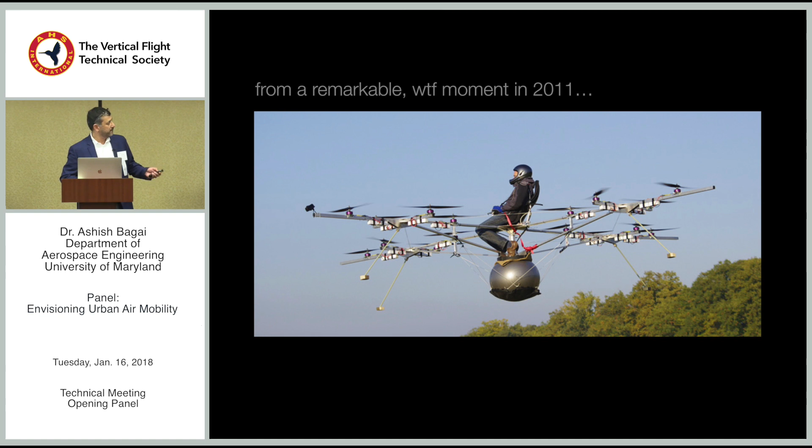To the pervasive emergence of electric-powered aircraft with distributed propulsion, we see today the proliferation of a new species in the taxonomy of vertical flight.

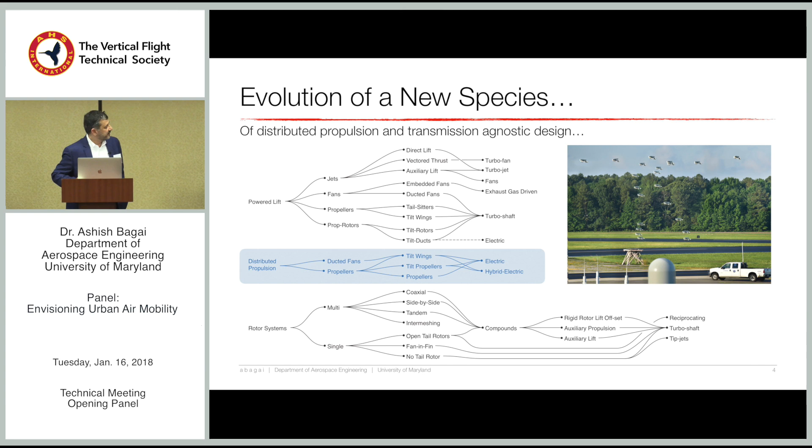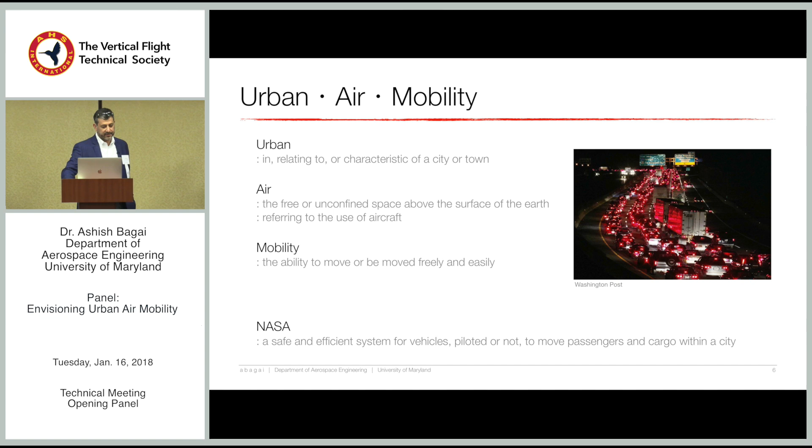So good morning, ladies and gentlemen. We are gathered here today to discuss the potential impact of these revolutionary technologies and the impact they will have on being able to transport ourselves expeditiously to and from our destinations. As we know, urban relates to the high-density ecological architectures that characterize towns and cities. Mobility relates to our movements within these constructs. But we envision, indeed aspire, that the added third dimension introduced by air will create new paradigms in transportation efficiency and convenience, and enable what hitherto has not been our prerogative.

We have today with us 5 outstanding panelists from an outstanding cross-section of industry to share their perspectives on what the future holds. Karthik is with A³ by Airbus. We have Scott with Bell Helicopters. We have Andy with Empirical Systems Aerospace. We have Mark Moore from Uber, and we have Chris VanBuiten from Sikorsky.

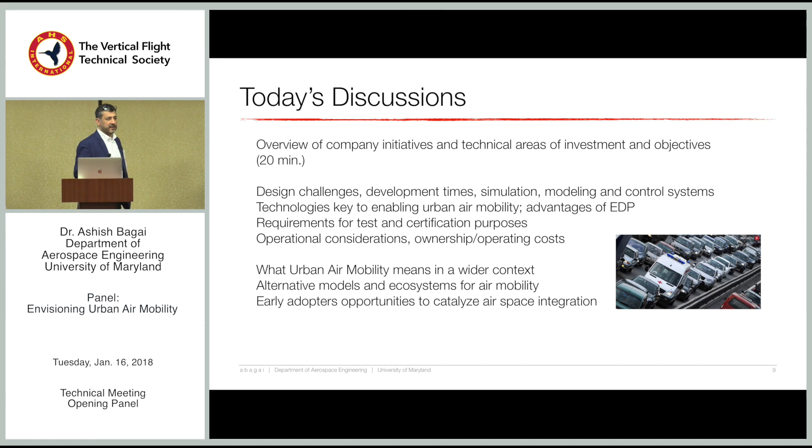For today's discussions, what I would really like to have our panelists cover is not only provide a bit of an overview of the incentives and initiatives they are pursuing at their companies, but also opine on their perspectives on what air mobility, and especially urban air mobility, means - talking a little bit about early catalysts, not just one particular model but other possibilities of early adoption related to urban air mobility. I would encourage you as the audience to think about the same types of questions you would like to ask the panelists. It's wonderful to be in a panel where everybody shares the same thought, objective, and perspective, but it's equally important to hear from the naysayers or the challengers to provide perspective on what we're going after here.

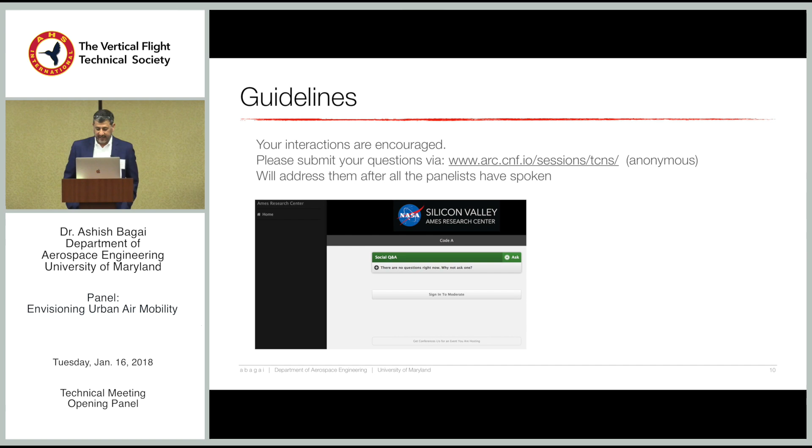So with that, I'm going to introduce Karthik. Karthik runs Altiscope, a project of A³ by Airbus. He's working to help regulators define the rules, policies, and processes necessary to enable large volume autonomous and unmanned flight in airspaces around the world. Most recently, he was co-founder and CTO of Coin, which was later acquired by Fitbit, a VC-backed digital payments and consumer electronics startup. He's worked with NASA Ames and Goddard, as well as the Aerospace Corporation on projects ranging from planet-exploring robots to launch vehicles. Karthik holds a PhD and MS in aeronautics and astronautics from Stanford. He designed and built advanced spacecraft technologies for the detection of gravitational waves, which we now know exist, and has a BS in aerospace engineering from UC San Diego.

So with that, Karthik. My name is Karthik. I run a project called Altiscope, which is one of the many projects at A³. You may be familiar with VOOM, which is our on-demand helicopter service running in Sao Paulo. You may be familiar with Vahana. This is a different project that I wanted to introduce you to today.

So I want to start with a video. This is the first video, just kind of our vision of what the airspace might look like in the future.

The dream of flying is as old as humankind. Today, our skies are busier than ever, with over 1 million people flying at any given time. By 2030, air traffic will increase more than tenfold as autonomous aircraft join existing traffic in the skies.

But in order for this to happen, decision makers need tools to understand their airspace. In collaboration with government regulators, Altiscope is safely enabling new uses of our airspace through deep analysis, policy simulation, and decision modeling.

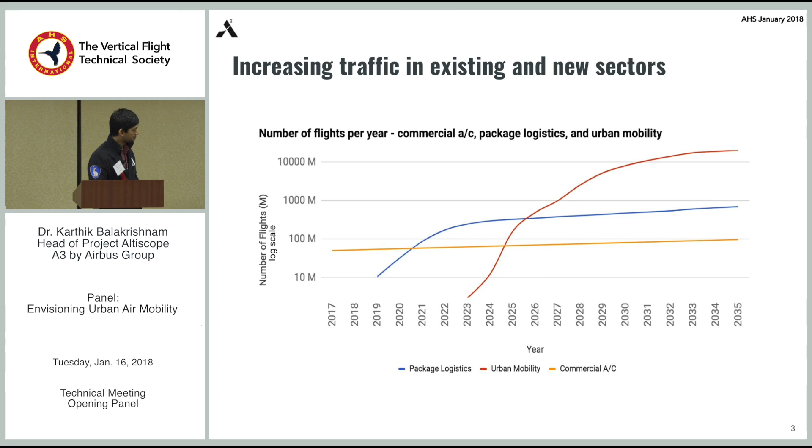This is a view out of our simulator of projected traffic in the year 2030 over Paris. If you can pause it in the middle, we can take a look. What you see is the airports, Charles de Gaulle and Orly, in the north and south. You see some gray dots right next to the airports.

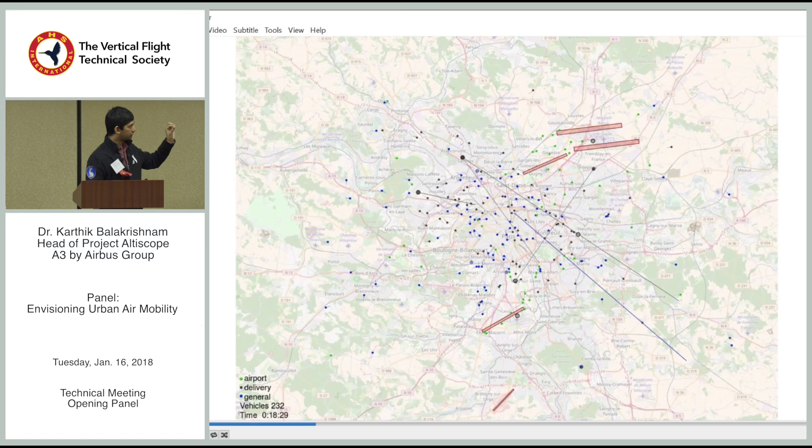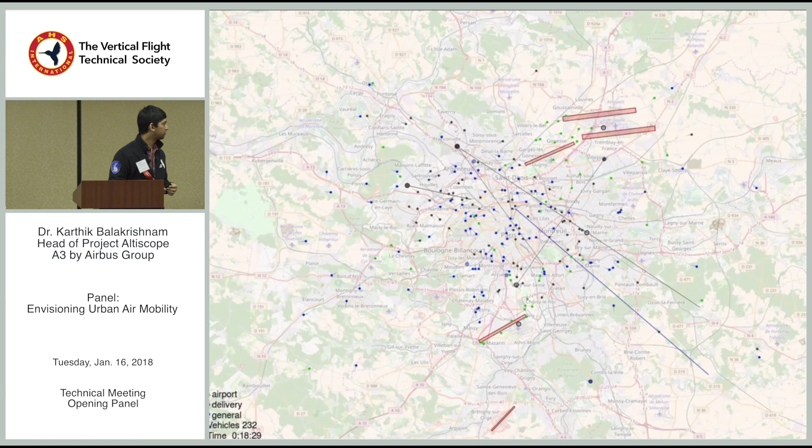These are essentially vertiports for bringing people in and out of the city to the airports very rapidly. The stationary gray dots around the city are package delivery hubs, for example, or ports within the city where lots of people are coming and going. And this is just a small number of vehicles. If you look in the bottom left, this number is about 232 vehicles in the air at any given time, which sounds like a lot, but there are a lot of people in a city. If you want vehicles used by the mass population, you may be looking at an order of magnitude more than that.

So a lot of vehicles, and the driving factor here is essentially that human air traffic control needs to evolve — air traffic controllers go from tactical to strategic, managing the airspace versus controlling individual aircraft.

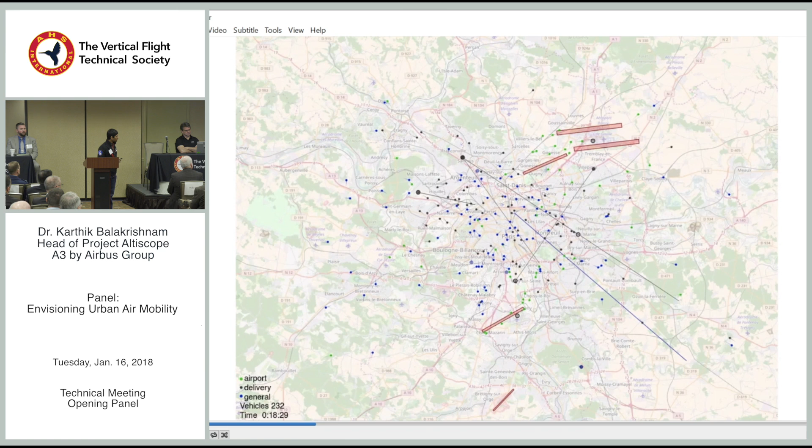So we can go back to the slides, or pull up video number 2. This video is actually in the south of France, in Bordeaux, kind of similar to Napa in that you have a city center that very quickly becomes rural. Even with these population densities, you still see quite a bit of demand — people who want to go long distances, tourists going from place to place, cargo being delivered from farms to factories, and geofence zones where farmers are crop dusting or surveying fields.

So you still see a hub of activity even in more rural areas where you might not expect urban air mobility to be the buzzword.

Finally, I want to show video number 3 — this is over a much larger area. If you can pause it in the middle so it stays on screen — this is Tokyo, Japan, a much larger area with a very dense urban core that very quickly turns much more rural, especially in the southeast area. What you see is still quite a lot of traffic coming to and from the urban core.

These simulations, I'll talk about how we generate them, but they're based on population density, economic demand, and people's commute patterns today, projected forward as a function of market share that might transition to these kinds of vehicles.

So it's not us thinking arbitrarily where vehicles might fly, but seeing demand shift from the ground to the air, and not really taking into account what induced demand might be. Induced demand by itself could be pretty crazy.

So we go back to the slide deck, please. How do we actually enable this? The first thing is systems have to support local needs, right?

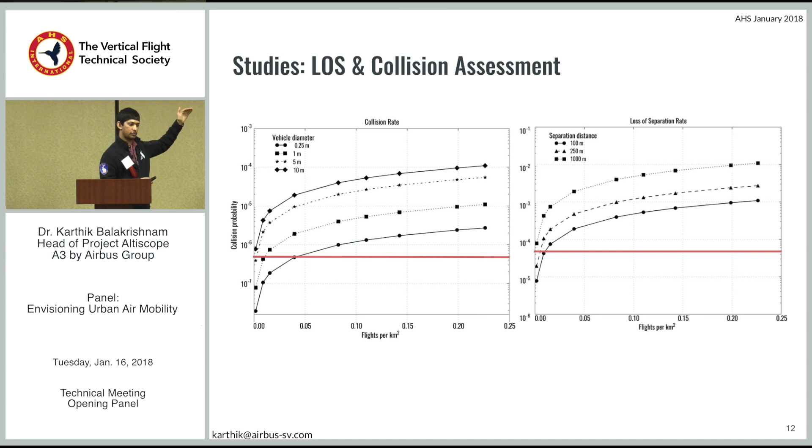What you see is that at very low densities, if you care about collision, you can introduce quite a number of aircraft into the sky without too much risk. But as you get into higher densities, that risk quickly climbs and exceeds what you see with commercial aircraft today, shown as red lines for collision on the left and loss of separation on the right. So the question becomes, how do we take these curves and apply deconfliction strategies, air traffic management strategies, to shift those curves below the red line? Or maybe it's a different line we need for unmanned systems, autonomous systems, and urban air mobility.

Another example is detect and avoid. We wanted to know, if we take existing ACAS systems and put them on all the drones in the airspace, what will the actual loss of separation rate look like? And how does that perform compared to not having any deconfliction strategy at all?

What you see on the left of this curve is that ACAS performs very well, which is what you'd expect from commercial aircraft systems. But as the number of aircraft in the sky increases, you actually get into a situation where today's ACAS performs worse than not having any kind of deconfliction mechanism.

Why is that? I think part of it is that as you try to avoid the aircraft next to you, you cause another potential collision with the aircraft on your right. It's like swerving on a crowded highway versus swerving on a highway at night to avoid a deer, you have to decide, is it better to hit the deer or to swerve?

So the question now is, well, not having detect and avoid is not really an option. So what should that system actually look like?

We work with transport planners to figure out, on the x-axis, where the densities are going to be for a particular community. Then you work with safety regulators to figure out what is the actual acceptable loss of separation rate or acceptable collision rate. Then you can look at various options for detect and avoid systems, run them through our simulator, and see if we're actually meeting or in the ballpark of that point.

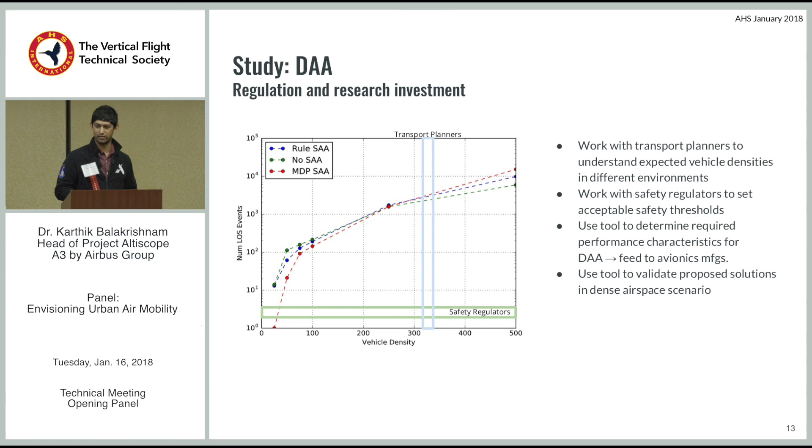Again, another example of the kind of studies we do with regulators: we need avionics to build our aircraft and to actually start flying them. How do we set requirements so that avionics manufacturers have the data necessary to design against, and the specifications to design against?

One final example is around communications. We'll have quite a bit more to share on this in the coming months, so this is a little light. But if you shoot me an email, I'll be happy to send you what we have so far.

Communication selection is driven by needs. This is obvious, I think, to everybody in this audience, but it depends on why you're communicating. Is it just sending out a beacon of who you are? Or are you actually trying to control the aircraft from the air traffic control system? Very different requirements on bandwidth, latency, and reliability.

A beacon might be once a second, once every 5 seconds. Real-time control might need 10 or 100 millisecond latency with very low packet loss. What's the geography like, what is the vehicle like? The kind of satellite dish you might put on a commercial aircraft simply won't fit on a small drone—it's an order of magnitude bigger. So just because you have a requirement on performance doesn't mean you can physically fit it in.

And finally, what are you trying to do with the mission? Is it manned or unmanned? What really comes out of this is that in a single airspace, you'll have to support a variety of architectures. Think about doing package delivery in the same city where people are flying around, where maybe the fire department is trying to get situational awareness over a fire—you'll have vehicles using 5G, LTE, SATCOM, a downlink, and also plugged into a wired connection, all trying to talk to the same systems.

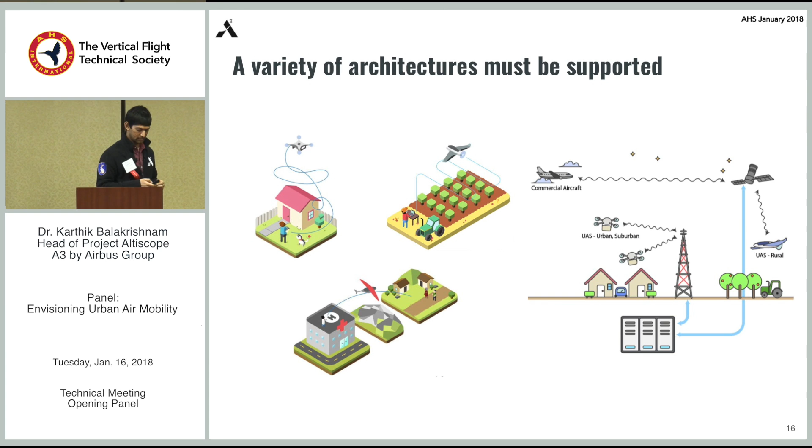So how do you actually harmonize this? Probably in the next couple of months we'll have more to share here. I just wanted to show this geographically. It really comes down to a mixed equipage problem—it's not everybody speaking the same language. Different people in different areas have different equipment that'll work for them.

What makes things more complex is thinking about transitioning from the top left, where there are very few aircraft and maybe no cell coverage, so you're using SATCOM, or just broadcasting your position and hoping Sense and Avoid takes care of it. Then as you transition down into the urban area, where you have a huge number of aircraft potentially using different communication standards—how do you ensure interoperability?

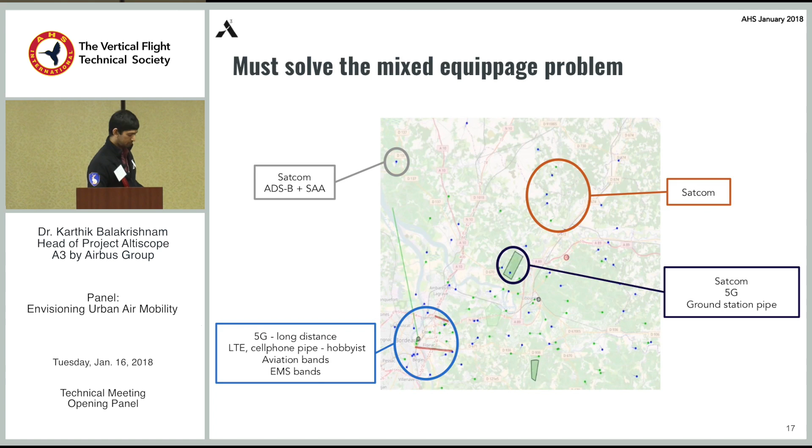So this is another one of our efforts. Essentially, we're enabling policymakers, operators, providers, and manufacturers to build infrastructure to enable the next generation of aviation. So thank you.

On my videos, I think they're embedded, so if you just press play for me, we can make it through without switching out. I wanted to start today with a conversation about on-demand mobility across a space of intraurban, interurban on the bookends, and also logistics in the middle, because I think it can go both ways, both urban and interurban.

On the intraurban side, we're going to talk a little bit about what you may have seen last week at CES—Bell presented their air taxi experience. And on the logistics side, before the Christmas break, we released a family of vehicles we call APT, Autonomous Pod Transport. We'll talk about that vehicle in the logistics space.

So this is the first video—a little intro that we did for CES.

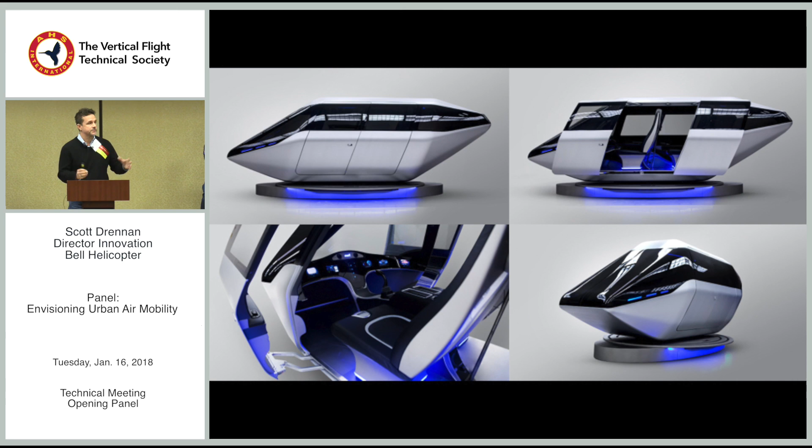So we're going to be around with this vehicle, hopefully at a few more shows—if you get a chance, look for those schedules and come experience this with us. We also had the back end of it, where you get in a simulated elevator and check into the flight. So it's part of the whole shooting match, not just the trip itself.

On the logistics side, we introduced this family of vehicles called APT, Autonomous Pod Transport. I'm so mad at the guys for changing it—the first name John McCullough and I came up with, John being the inventor of this along with his friend Paul Oldroyd, was AAPPT. It still spells out apt, but now you could add autonomous, all-purpose, and it was so much better. But comms got the best of us and simplified it to APT.

This is a family of logistics vehicles that range from small, medium, and large. Small is sub-55, Part 107. Medium, we can tote around maybe up to 5 to 800 pounds. Large, into the thousands of pounds. We've set it up in a very simple configuration—as you can see, it's a tail-sitting biplane. If you do this right, you can do unicorn things like modularity of propulsion: one mission might require electric, one might require hybrid, one might require a gas-burning engine. The pod in the middle is very modular as well—you can envision it taking on any package, whether contained inside the pod or hanging separately between the pylons. A lot of interest and a lot of fun parts.

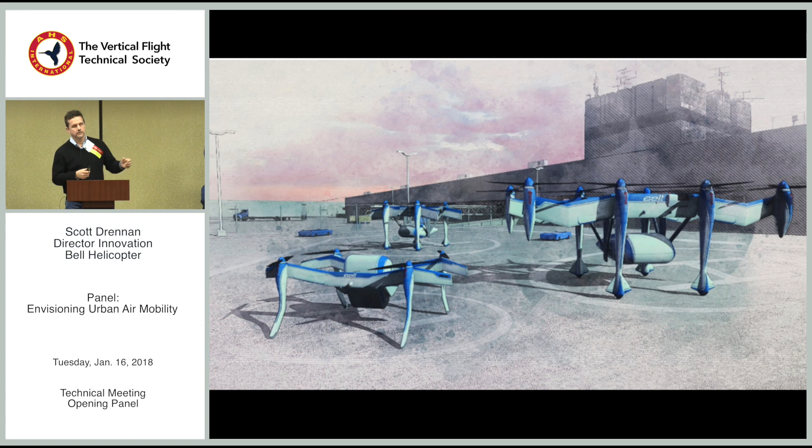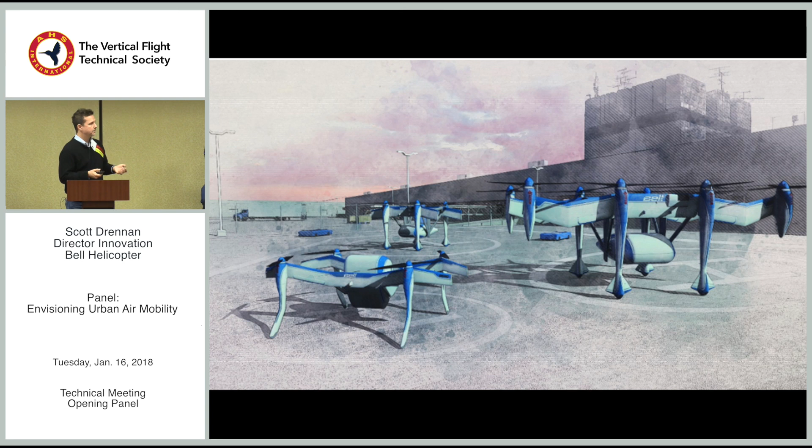You're about to see a video on the small side of how this aircraft flies, and I think you'll see the power of it. It's tactical, able to land in urban environments because it's VTOL, but then it gets on a wing real quickly and gets you your package when you need it.

So we just converted to airplane mode, do a once around in airplane mode, and you'll see her come back down and land.

What I think is interesting about this goes back to the second half of the definition we talked about in mobility. So mobility, moving things from one place to another, is one thing, but easily and efficiently is another. If you get wing-borne, the easy and efficient really starts to make sense. It's about the speed of delivery, the distance of delivery, and a vehicle that can do edgewise flight and wing-borne flight is, in our opinion, the answer to that equation.

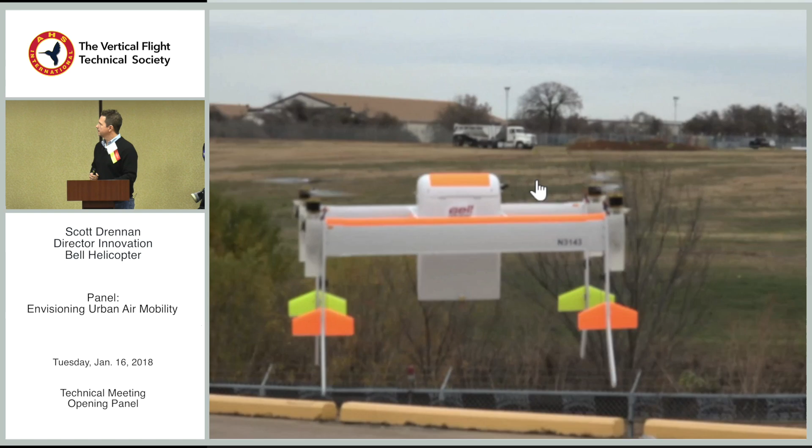This was out on Bell's property and under Part 107 rules.

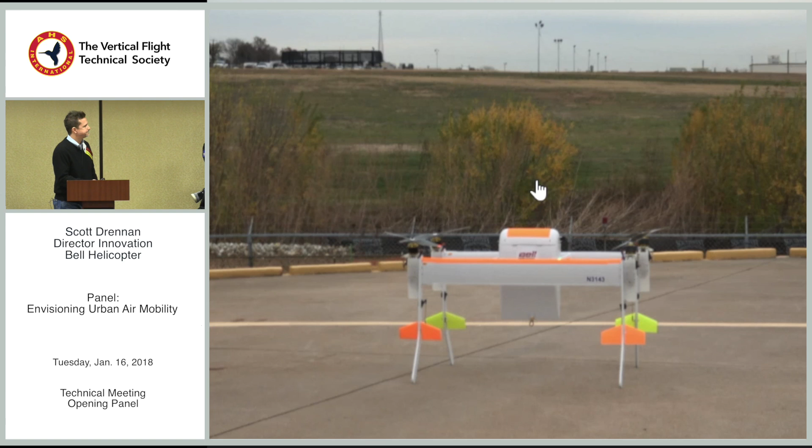Another interesting point about that vehicle: in the early days, when we kept on-demand mobility as one word, saying we can move things and people in the same vehicle, we thought maybe that was it, maybe that's better for logistics. You see the Spartan nature of that vehicle. Perhaps it would be too fun of a ride for passengers if there was a pod in there that rotated on a gimbal and came forward and aft for CG management. But there may be folks that want to do that mission as well, so that vehicle is there to answer that too.

And then you see now where we're headed on the air taxi side, where it starts to become more of a consumer-digestible version.

We were also asked to talk about a few challenges. All challenges are opportunities, and these are three new tech areas I'd like to focus on. We typically talk about transformative lift, powered lift, and flight controls, now combined with propulsive effectors, certification, and autonomy. But I've picked three different ones because everybody here is familiar with the others, and probably familiar with these too, but I thought it would mix the conversation up.

So the first challenge for us is getting this digital fabric right. It's not just a thread. I'm going to show you a video that looks like just a thread, but it's the digital fabric we use to get the V280 from the drawing space to flight in a record amount of time. If you listen to the video in the right way, you'll see that this is truly a fabric, because it not only touches engineers to the manufacturing floor, but then extends to our customer.

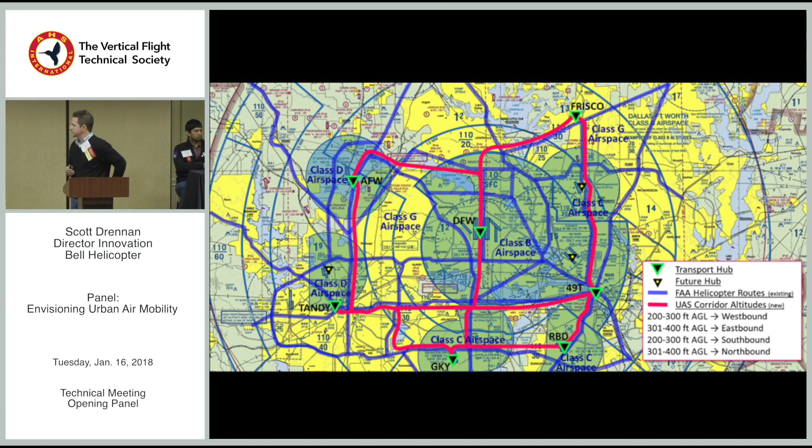And then the next one, reach the masses. Again, it's about folks that have never been in vertical lift before, so we have to produce at scale. I've talked about this before - we need cellular mechanized manufacturing. It's not automobile F-150 rates at 750,000 a year. It's somewhere in between, in that boutique range.

I pulled in a new slide, and I want to talk about this in terms of 2 mistakes we always make in this industry: synthesis of rapid prototyping and production. What goes wrong in this conversation? One goes wrong when we're overly optimistic, and one goes wrong when we're overly pessimistic. So let's see if we can find the balance.

We're always overly optimistic when we prototype a vehicle or demonstrate a vehicle by saying, that's our production vehicle, that's our certification vehicle. In my experience, and probably in yours, those vehicles have some change to go through because you're learning the most about them as they're flying and operating in the early days.

On the negative side, you always say, well duh Scott, we don't use the same tools in prototyping that we use in production, we don't use the same machines to do that. So on both of those, I say, why and why not? On the side of going faster and reaching more customers, that initial vehicle's closer to the final vehicle - can we do better there to make this synthesis make sense? Can we get that vehicle closer safely, but closer to the final production vehicle, so the experience wheel starts early and the adaptability starts early?

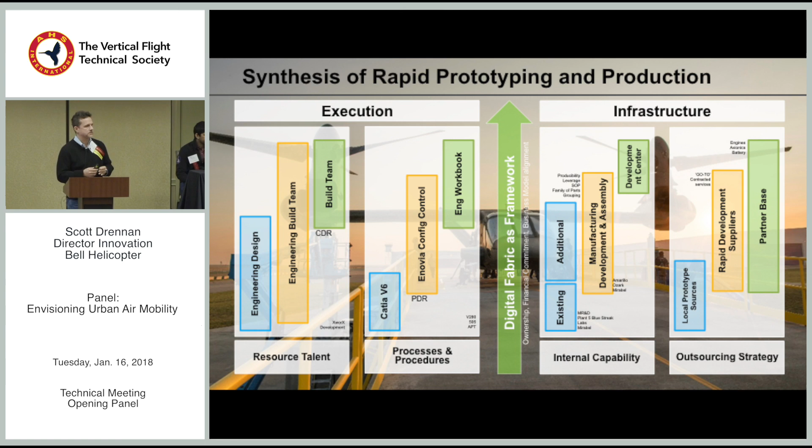And then the final one is the business model. We've talked about this one before, but I've expanded a little bit. There's opportunities as an OEM - that's obviously where we are today. But what about Bell being an operator? Can we do that? Can we maintain a vehicle that we designed better than someone else? Can we service or fly those vehicles better than someone else? So we're having this discussion internally. It's a hard discussion, as you can imagine, because it's a whole different sector of the marketplace.

But it's very interesting inside this urban air taxi model when you know that you're trying to maximize the dollars that are in there so that everyone can join in. On the booking engine side, Uber's got that covered - it was an interesting setup, and others too, but Uber's got one of the best setups for it on the ground, and we believe it's going to get there in the airspace too. But that's where we started to say, we stay out of that.

But what we did is we started to list things that we do or do together across operator, OEM space, and booking engine, and you find these wonderful moments of synthesis again that you ought to start to discuss with each other. So the OEM skills carry over into operator skills, carry over into some of the booking engine skills, and that's why ecosystems like we're discussing today and throughout the week are really important.

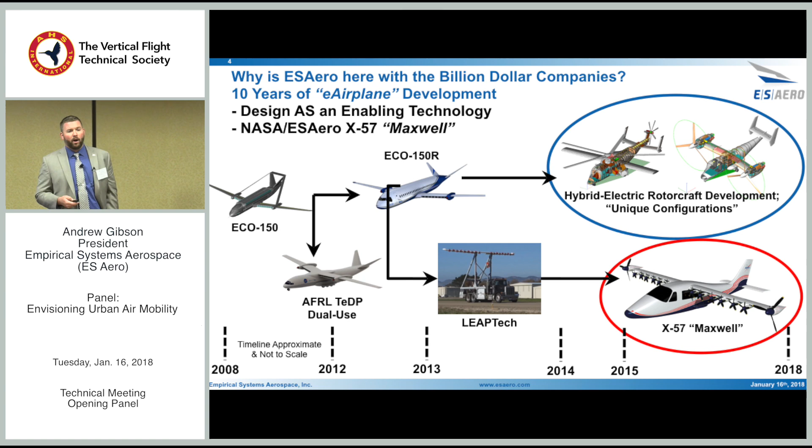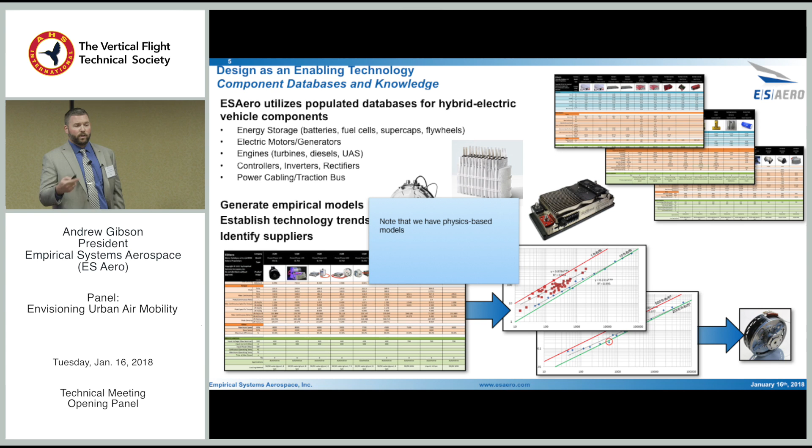So when you start the design process - and 10 years ago, the component databases didn't exist, the various vendors that are working components didn't exist - so knowing your supply chain, knowing your components, are critical even very early in the design process, as they're going to drive your integration, which I'm going to show a little bit of, but it's also going to significantly drive your design. So once you have a good understanding of your components, and now that vendors exist, you can begin to fill your database with physics-based models for electrical motors and things.

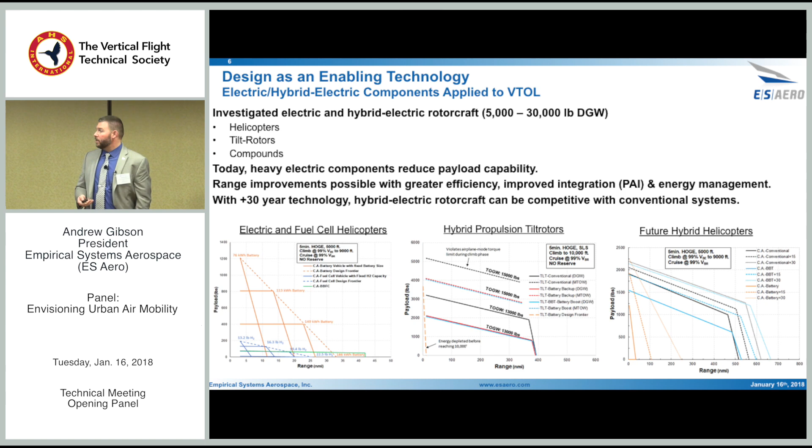Then once you understand your payload range and you begin to get your configuration at least sketched, you really have to dig into your mission planning and your energy management. You're no longer worried about fuel remaining on board in an OEI condition. You're worried about how much energy do I have on board.

Really what these are is specific endurance and specific range equations, which we've completely modified for electric VTOL. You really throw out all conventional design equations for electric air vehicles. So essentially you can imagine for every different nacelle point through transition, and V-22s will cruise around at 30 or 45 degrees tilt. They do it over the Central Coast all the time.

Where does that fit? So you begin to create a carpet plot where you can compare both propulsion architectures for a given configuration, but you can begin to also assess configurations against each other, and that's kind of, for the tools we have today, how you can begin to assess your design space.

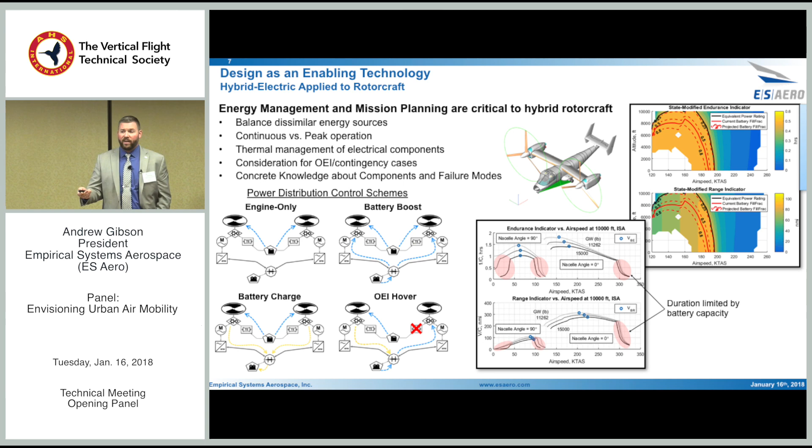So with electric propulsion, you can push them beyond what turbines can do in some cases. You can push your motor to 150%. In the case of X-57, we can push our controllers to almost 200%. So you have this capacity to really push beyond what the conventional turbine can do. Your OEI case is no longer 50% -- it could be 75% or even still 100% for a very, very short period of time.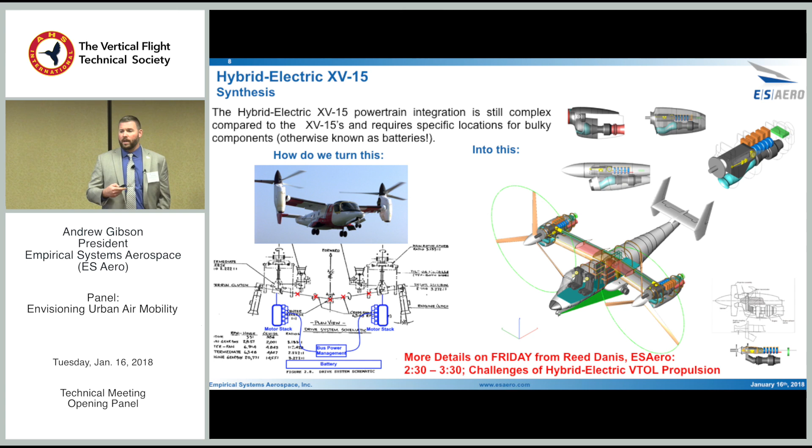This will be covered by Reed Danis on Friday in a panel. He's on the hybrid VTOL panel. He'll be digging into these performance charts a little more and what it means for mission planning and kind of how you treat that during the conceptual and preliminary design phase.

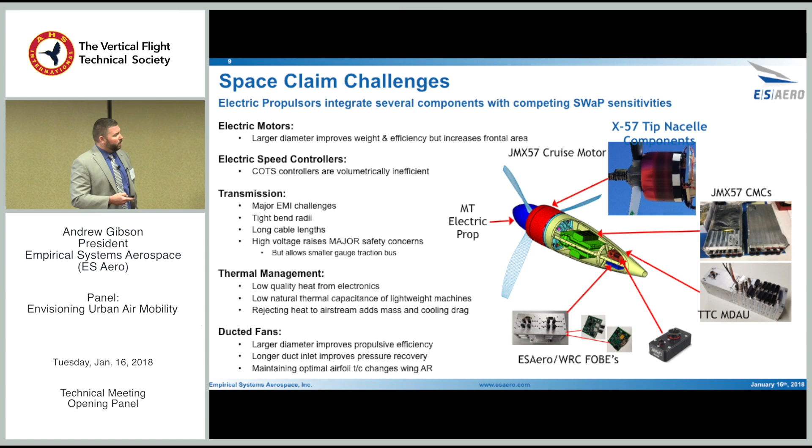So on space claim challenges, we'll talk a little bit about X-57. You see here the X-57 cruise nacelle, where we have the JMX57 cruise motor controllers crammed in there. Those controllers are overperforming very, very well to where a single controller will actually run the full power of the motor. The JMX57 is out there on the tip. You see a picture of the hardware there, and then some of the instrumentation equipment we've designed in the back there.

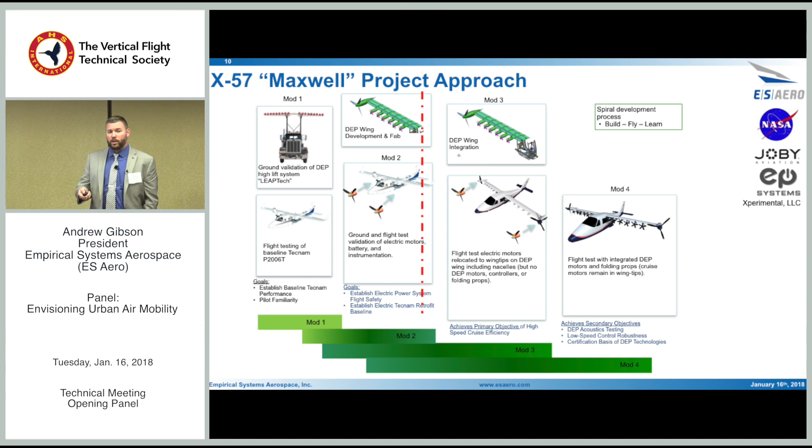For those unfamiliar with X57, it's a NASA X-plane that Mark Moore is kind of the father of, before he left NASA to go to Uber. So we're trying to not disappoint you. We're in the middle of Mod 2 right now, actually the tail end of Mod 2, and the airplane will be flying this year. We have the Mod 3 wing under development, you see it on top, that's the high aspect ratio distributed propulsion wing. The conventional Tecnam retrofit will fly again this year, where Mod 3 will be integrated and built also this year, getting ready for flight in 2019, just down the road in San Luis Obispo, California.

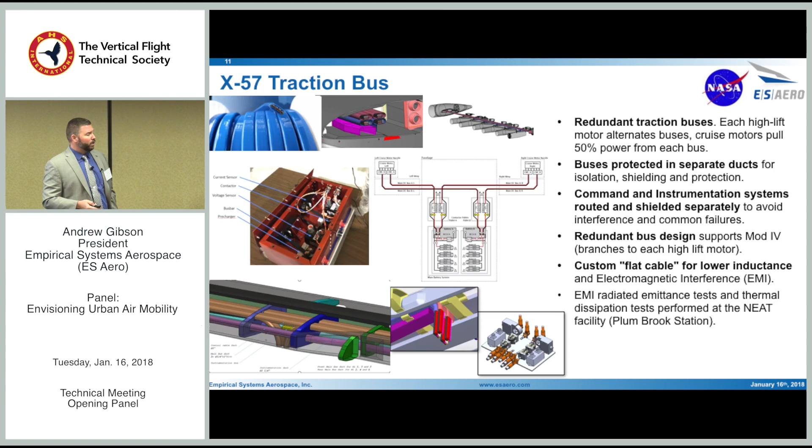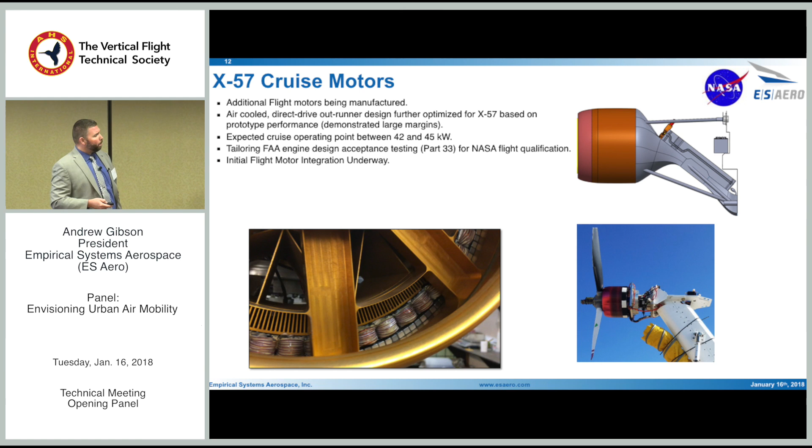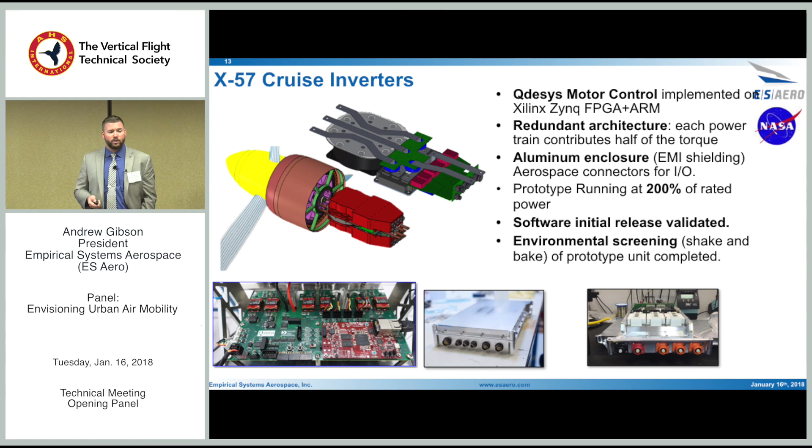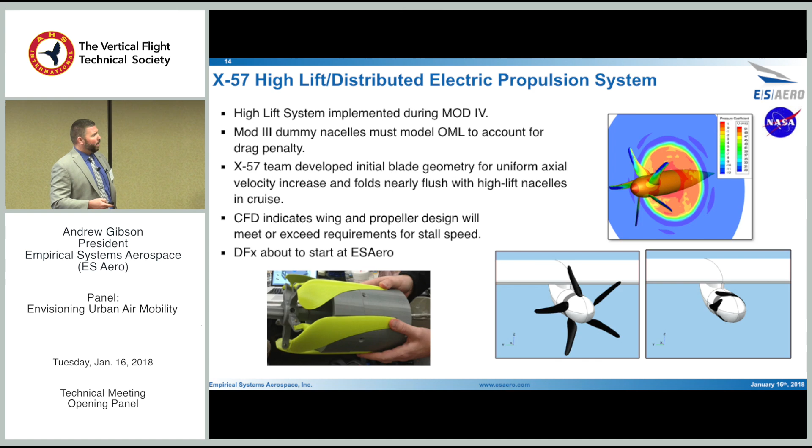Okay, flight batteries - we're going to get into batteries. I saw one of the questions that popped up was about noise. I think batteries are one of the other most important things to enable on-demand mobility.

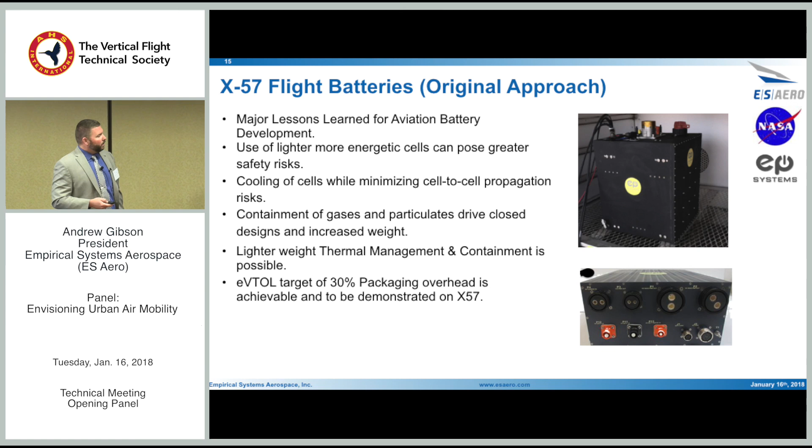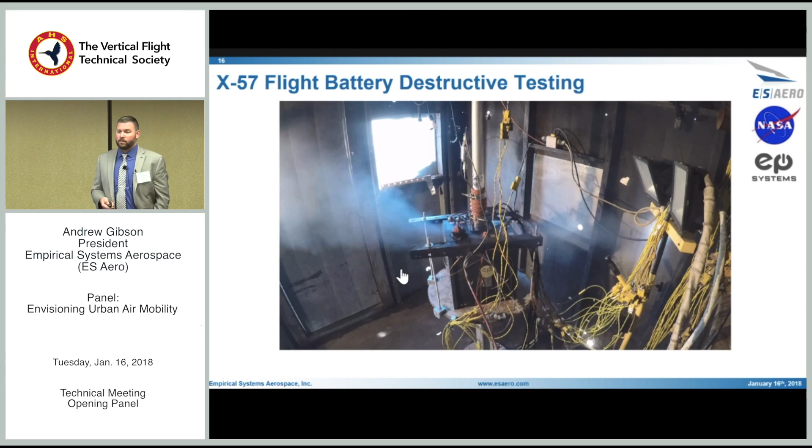Our early battery design was designed to meet what the ASTM standards are going for now. There's a lot of work within ASTM and SAE to define the standards for these flight batteries. And it failed - destructive testing in epic fashion. So we're going to show a video of that. Hopefully volume's on too - keep in mind this is all with safety features turned off, no fusing on the systems, and the battery management system disabled.

So that's one of 8 packs that's going to go into the X57, about a 55 kilowatt hour battery, which is actually smaller than a lot of the battery systems that would be flying around in a 100 nautical mile eVTOL. The failure we had here was actually in the Teflon burst disc - it did not fail at the specified rating, and that's not something we had taken through qualification with EPS; we just took the spec at its word. It led to overpressurization of the case, which caused the batteries to run away significantly faster than they should have, leading to a whole bunch of sidewall ruptures in the cell. Very interesting - it really drove us to control cell-to-cell propagation and thermal runaway, which was not the case for this battery design. So batteries are a major issue.

Uber's really working to push that forward. They've brought on Tesla's battery expert to bolster this entire community and address this issue, so you're not sitting on a battery when it goes up.

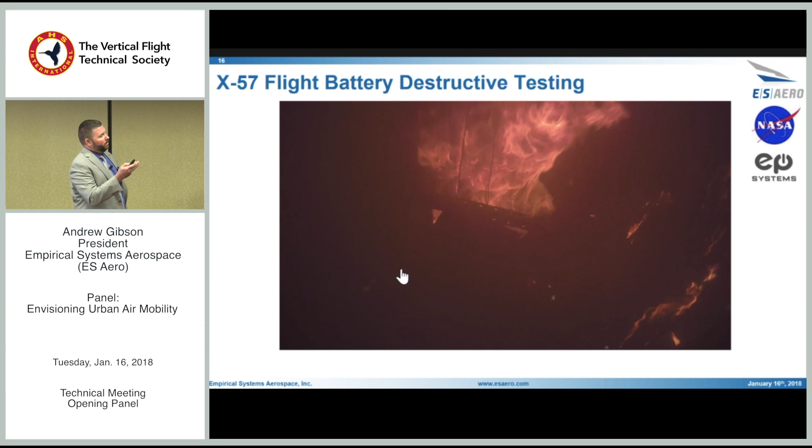X57's gone through a revision, and I wouldn't show you the bad video if I didn't have a good one, which is very uneventful, thankfully. We redesigned the entire battery system at the same packaged weight as the previous system. We've now split it into 16 battery modules instead of 8 like before, with about 300 cells in it.

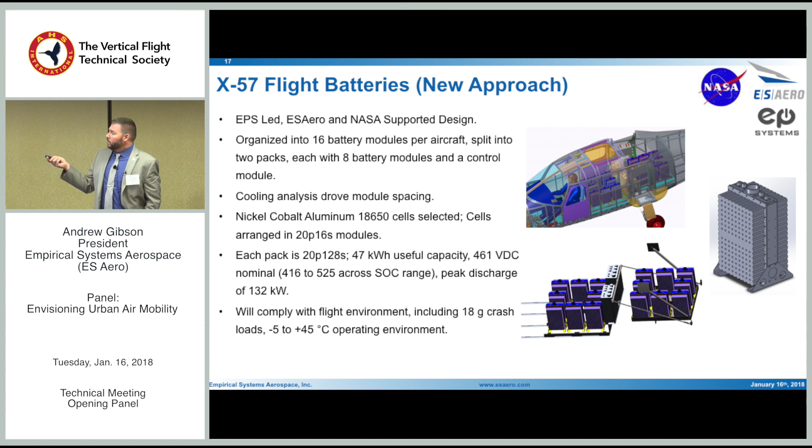This design was destructively tested just after Thanksgiving in Logan, Utah. EPS and Utah State have stood up a new facility called the Blast Lab, specifically to do eVTOL battery testing. I'll start the video on the right, which will start from the clicker.

You'll see a small puff of smoke come right out of the scat tubing, because it turned out there was a little pinhole in it. The camera view will change here in a second. You'll see another little poof of smoke, and that's as eventful as it got - that was a single cell going. In the top video, you can see that cell heating up and actually going into thermal runaway, but not propagating to any of the adjacent cells. One little puff of smoke, you continue your flight and move on with your day.

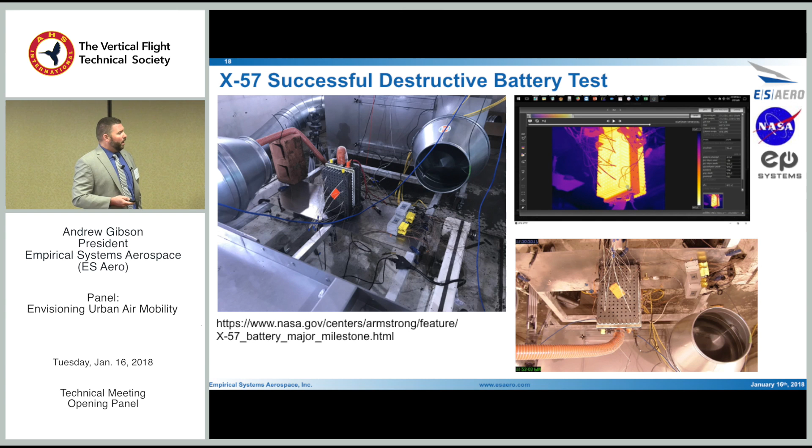So very high performing battery system, about a 30% package factor. NASA featured it as a major milestone at that web URL there if anybody wants to type that in. So ES Aero is fortunate to be working on both ends.

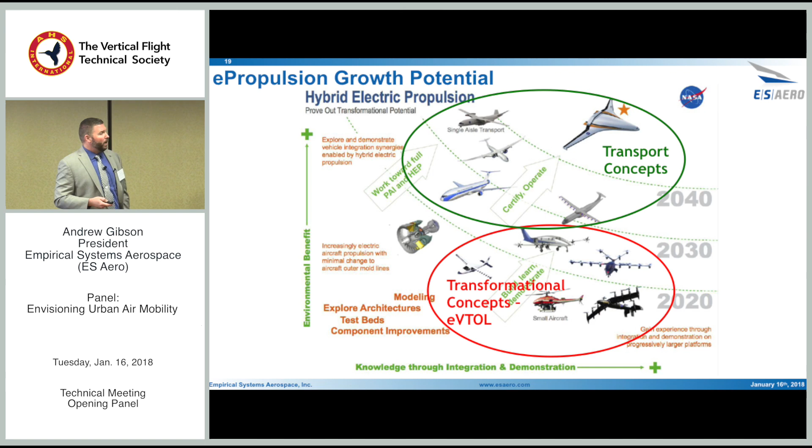We've been working on transport concepts with our Eco 150, but we're really cutting our teeth and pushing forward with hardware as well in the transformational concepts, which is where the eVTOL is. In these two areas, there's going to be a convergence. Anybody who's seen these charts, seen me present them at AIAA for example, that green line keeps getting longer because the work going on in this space is driving these two areas to converge much sooner.

I think we'll see a 9 or 19 passenger parallel hybrid transport here in the 2025 timeframe. We're really kind of pushing to that with the component integration work going on here, which is driving a lot of component design and development work on the higher end, on megawatt level machines, 2 megawatt level machines.

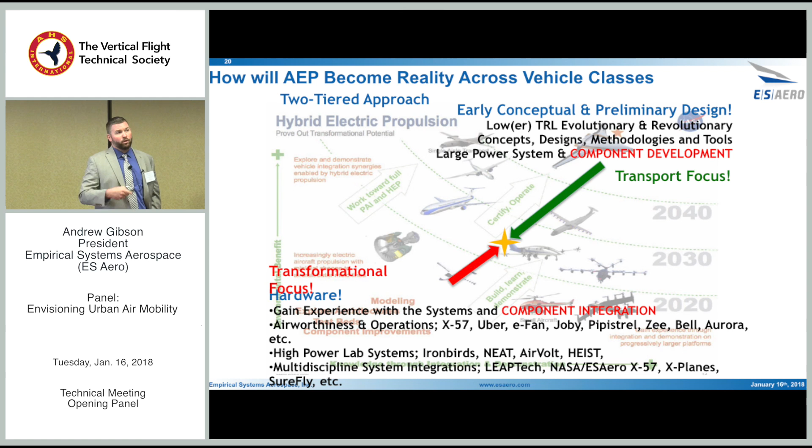On that note, I have Mike Hirschberg's permission to plug the EATS Symposium, the Electric Aircraft Technology Symposium. This is very component based - it's not going to be VTOL specific or transport specific. It's a collaboration that AIAA is doing with IEEE. I'm one of the technical co-chairs for it, Phil Ansell from UIUC is the other one. Contact us for information on how to submit an abstract if you have a propulsion technology that fits under one of these 3 areas, or if you just want to come learn about it, sign up. The conference is in Cincinnati, so all the major aerospace propulsion companies are going to be there presenting their work in electric and hybrid electric propulsion.

For sizes larger than what we're really talking about here, but still the industry is going to push that direction and begin to converge. That is in July after the AIAA Propulsion and Energy Conference - I believe it's the 13th and 14th of July. So with that, that's all. Thank you.

If you know me, all I've done at NASA is work on VTOL design and technologies my entire career. It's what I know and what I love. Also, 32 years at NASA has made me very much a collaborative kind of guy. And now I've been at Uber for 1 year, and I have to say, I love the strategy we've implemented there, which is a very collaborative ecosystem building approach. We know we can't do it all alone.

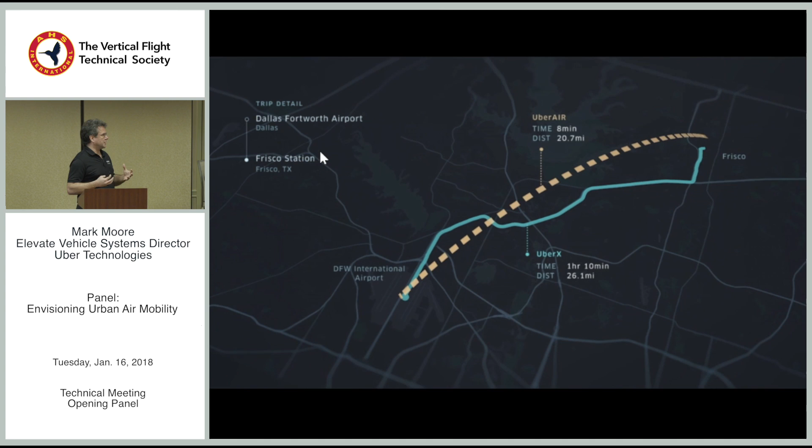Right up front, in a nutshell, what we're talking about is being able to provide, in densely populated urban areas, a new transportation choice for cities and users. This is especially important if you look over the next 20 years. The projections on the ground are horrendous for these major metropolitan areas, and the projections are that these cities become much larger.

So giving cities a new option to increase their productivity is very important to us. And as Scott pointed out, this is a flight that we've flown with Bell on their helicopters. Our hero route is to show that we can do this, what would be an hour and 10 minutes on the ground, in 8 minutes in the air.

What's really important, because I've lived through the peaks and valleys of aerospace, if you look back at 2008, 2009, when many companies were taking on the VLJ market, the very light jet market, what they called air taxi. One of the things I saw, and I had a good friend of mine, Bruce Holmes, who most of you know, go to DayJet. The thing I didn't understand was how they could be economically profitable.

Because if you look at their business model, they were operating over, for instance, all of Southeast Florida and Georgia, and essentially had an 800-mile diameter of operations, with only a few hundred aircraft servicing that.

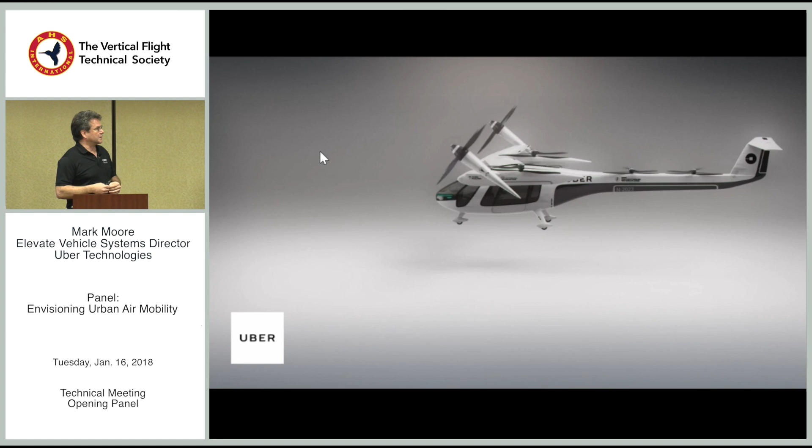So again, we feel it's really important to rise the tide of understanding of eVTOL. We've encouraged NASA to also share common reference models, and we encourage, in fact, all of industry to come together to lay a long and great foundation for electric VTOL aircraft.

So just closing it up, again, you're going to hear a lot more about Uber Elevate throughout this conference, and really, really appreciate the leadership of AHS. They have been in on this from day one, as I was at NASA trying to struggle to push this forward. Just cannot thank Mike Hirschberg and AHS enough for seeing this new market and opportunity develop. Thank you very much.

We really appreciate this opportunity to share a Sikorsky perspective. This is really exciting. You are all pioneers, right? We're at the tip of the exciting beginning of this journey, and this is going to happen. And the leadership that you're all exhibiting by being here and, to Mark's point, collaborating and having this discussion is what's going to make it happen.

Let me just give you my bottom line up front. This is absolutely going to happen. We could talk about when and at what scale, but it's going to happen. My opinion, or Sikorsky's opinion, is informed by building the Firefly demonstrator in 2010. And the big thing we saw in Firefly—the battery technology wasn't there at the time—but that picture shows all the parts we took off a conventional helicopter.

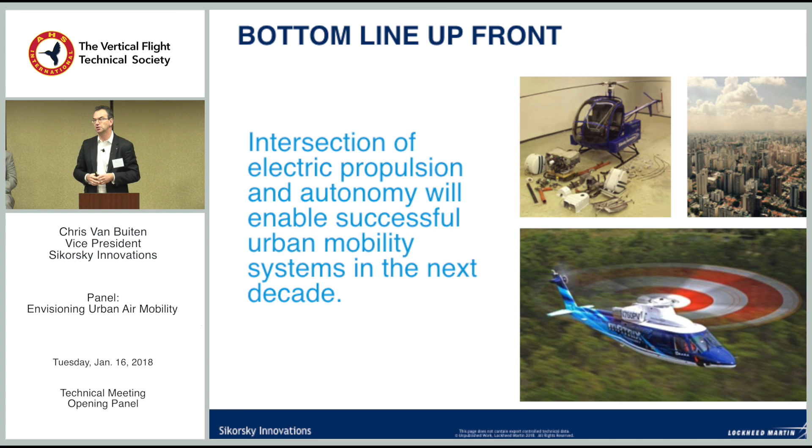What I'm going to focus on today - we're flying it at Sikorsky, we think the autonomy technology required. I really like that the panelists have masterfully architected - we're each talking about different pieces of the problem. We're flying the autonomy technology that would let any of you press a button and move safely through national airspace from one spot to another in a very complex helicopter at the required levels of safety.

I'm a huge proponent - we've got to come up with a name for it, but the Newman criteria. Dan Newman, tech fellow at Boeing, last year at the joint session of AHS and AUVSI, said: I just want to sort out the wheat from the chaff here. If you're working on a new platform that you're not ready to put your family on and have them fly on it every day, you're working on a toy.

If you are architecting your product from the beginning and thinking about a clear path to your entire family going on board the system and flying every day, and that means leaving from the 60th floor of a high-rise building in an urban environment, then you're starting to think about making an aircraft.

And this is important, right? We all are taking on a commitment as we start this journey to work to the highest levels of safety. There are many industries that have had an incredibly bright future wiped out by some premature early mistakes that in this case could have very high visibility. I think we as a community have to collaborate to make sure that doesn't happen here.

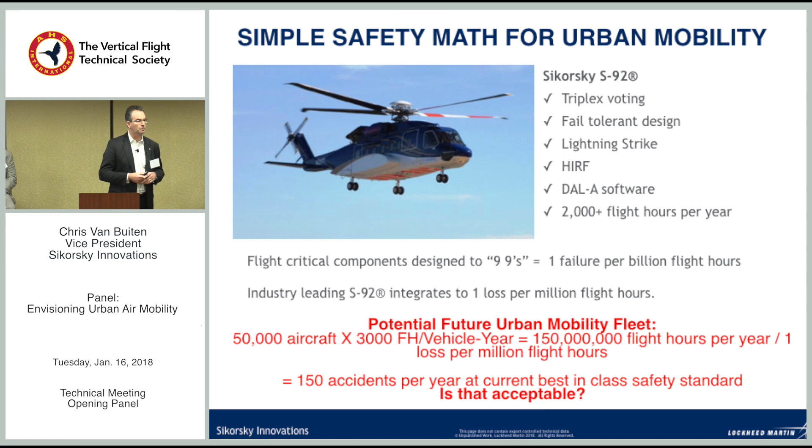So how do we design these systems for the highest levels of integrity? This has been the Sikorsky strategy for this piece of autonomy. Building on a tremendous pedigree of fly-by-wire helicopters, we launched a 6-year program to mature the fundamental technologies to enable a non-skilled pilot to press a button and be delivered to another spot. And I like how the Lieutenant Colonel talked about breaking complex problems into pieces - we didn't take on the vehicle piece. We used some of the safest existing helicopters out there and added the autonomy to them to demonstrate this capability and mature the technology. We're 6 years into that.

We partnered with Graham and DARPA on the Alias program, and we think we've fundamentally demonstrated the technology. There's still work to do - we're filling in gaps, but after that 6-year effort, we think the matrix technology we have can, at the required levels of safety, enable that simple operation of a helicopter in complex national airspace. Talk is easy - we've demonstrated it. We've flown a couple hundred hours. It's now time to certify and qualify it.